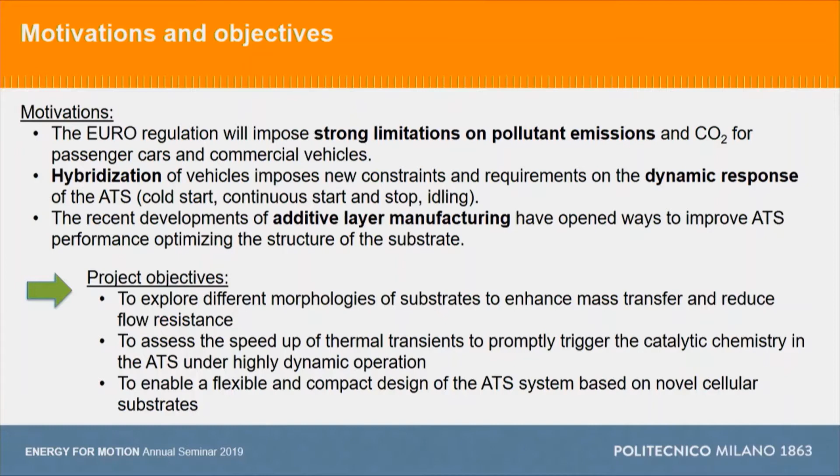Further to that, the hybridization of the vehicles will also strongly impact the emission levels. In particular, the temperature levels will be affected, and we can also expect significantly more transient operation modes of the catalytic devices for emission control. So, in essence, a change of paradigm is substantially needed.

Luckily enough, however, new tools are also becoming available, and one of them is represented by the new additive manufacturing techniques being developed, which enable or at least promise an outstanding freedom in the design of novel cellular substrates for the catalytic devices that we can install on board vehicles. And the goal of the thesis work that I'm presenting today is exactly to explore this freedom with the aim of designing, developing, testing, and assessing new cleanup catalytic devices based on these new enhanced cellular substrates.

What we know from preliminary studies is that the transport properties associated with these open cell structures, in terms of pressure drop and in terms of mass and heat transfer, can significantly outperform the conventional honeycomb monoliths which were implemented already 40 years ago in exhaust aftertreatment catalytic technologies.

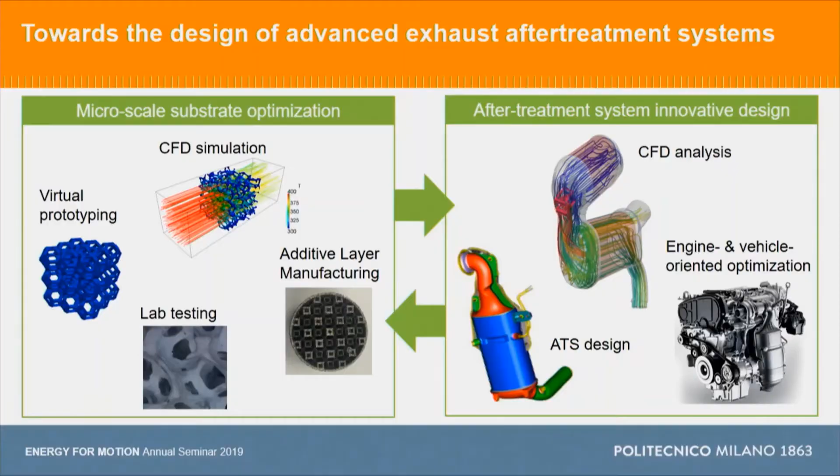So what we will do essentially is to address both computationally and experimentally the study of these new cellular materials according to a multi-scale approach, where we first investigate the geometry and the transport properties of these 3D printed cellular structures with different cell shapes and different geometries at the micro scale level, and then we scale up these results to the simulation of the full-scale exhaust gas aftertreatment system under real working conditions.

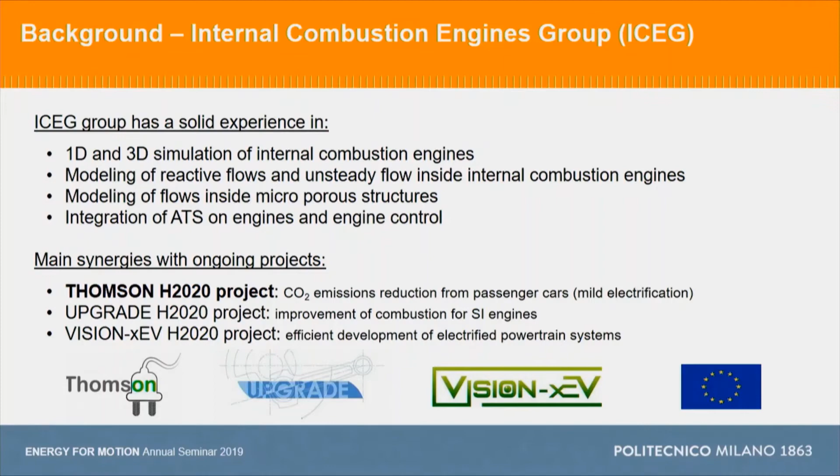To meet this goal, we will combine the knowledge and the expertise of our two research groups. The internal combustion engines group has a well-established and well-recognized experience in the development of numerical tools for the simulation of non-reactive and reactive flows in combustion engines, also addressing the coupling with the exhaust gas aftertreatment systems downstream. And they are currently involved in three highly relevant European projects which are listed in this slide here.

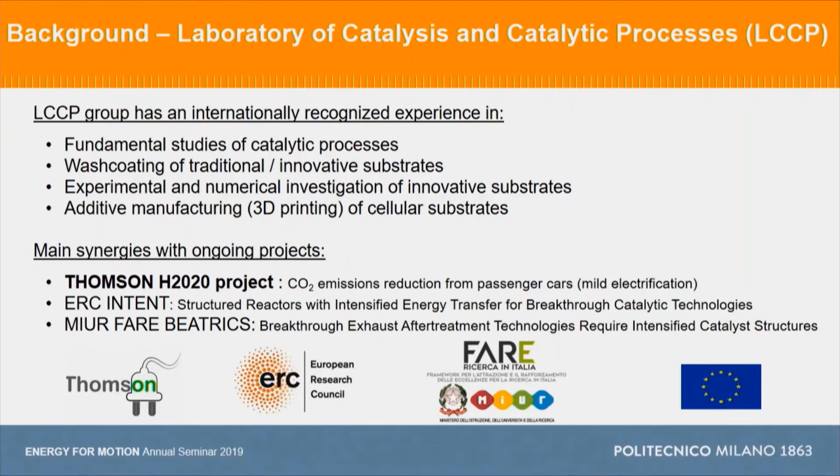On the other side, our catalysis group has a recognized experience in the investigation of industrial catalytic processes, and particularly we have a long tradition in the investigation of catalytic processes for the abatement of polluting emissions, specifically in automotive catalysis. And what is particularly interesting is that we are already collaborating intensively and very satisfactorily with the internal combustion engine group in the Thomson project, which is focused on the development of optimized cleanup technologies for passenger cars with mild hybridization. And we are also involved in two major projects dealing with the development of structured catalysts, which is also quite relevant for the topic of this doctoral thesis.

One of them is funded by the European Research Council and has to do with the application of structured catalysts to the intensification of catalytic processes in general. But we also have support from the Ministry of Education and Research in Italy for a related project which is focused specifically on the application of structured catalysts to exhaust gas aftertreatment technologies. So here is the plan.

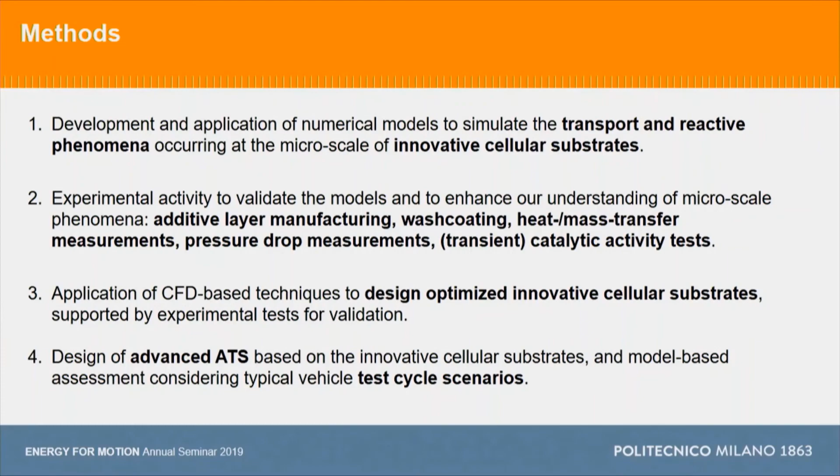What we are going to do is to start with the development of numerical strategies and approaches for the simulation of transport processes and reactive phenomena at the micro scale in innovative cellular substrates. In parallel, we'll also run an experimental multidisciplinary activity which would imply the 3D printing, additive manufacturing of different cellular structures with different geometrical characteristics, and the catalytic activation of such structures by wash coating with a catalytic material.

We will run measurements of the heat and mass transfer properties of these systems along with pressure drop measurements. And we will, of course, also run lab scale catalytic activity tests, also under transient conditions, to fully characterize the performance of these systems. And the goal eventually is to scale up all of these results in order to develop optimized cellular substrates for advanced cleanup technologies and to achieve a model-based assessment considering also the latest protocols for vehicle test cycles.